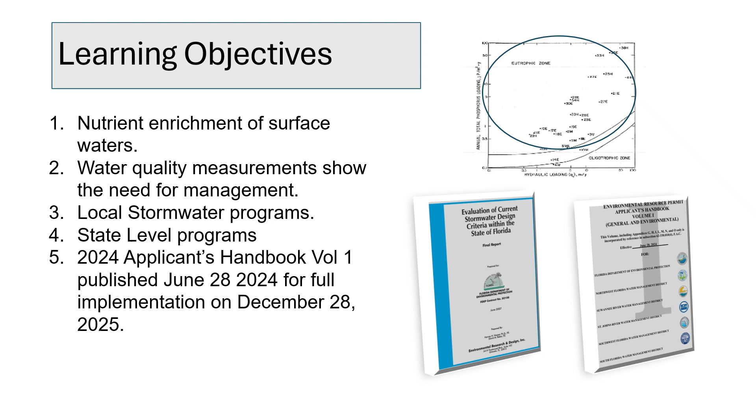Our understanding of nutrient levels in water bodies comes from extensive data collection and evaluation. Historically, back in the 1970s and 80s, significant efforts were made to measure nutrient loadings in surface waters, correlating these levels with surface runoff volumes. What these studies revealed was quite striking. In one particular study area in Florida, over 90% of the surface waters showed a clear enrichment of nutrients. This condition of excessive nutrient enrichment is formally identified as a eutrophic or nutrient excess state.

The scientific findings were further bolstered by a strong social need to address the consequences of this enrichment, such as the frequent algal blooms and the unacceptable odors that often accompanied them. This combination of scientific assessment and public demand provided the necessary support to initiate efforts aimed at improving water quality through nutrient reduction. It's important to note that these nutrient measurements are typically conducted on an annual basis.

This frequency is due to the long holding times of water in many of our lakes and estuaries, meaning that the impact of nutrient inputs plays out over an extended period. Consequently, the performance of stormwater best management practices, or BMPs, is also evaluated based on these annual nutrient loadings.

When assessing the quality of our surface waters, we often use the Trophic State Index, or TSI, which classifies them based on their biological activity. This index is typically calculated using three key indicators: light penetration, measured by a Secchi disk, the concentration of total phosphorus, or TP, and the amount of chlorophyll, often abbreviated as CH. Based on these measurements, waters are categorized into one of three main classifications.

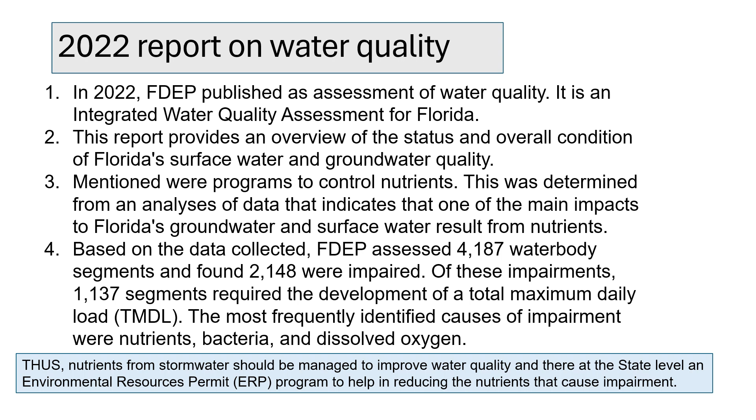To address this, Florida has the Environmental Resources Permit, or ERP program, at the state level. This program is designed to help reduce the nutrients that cause impairment by establishing performance standards, requiring a specified percentage of treatment, and aiming for a net improvement where post-development conditions are equivalent to or better than pre-development conditions.

Building on the understanding of phosphorus water quality data and its relationship to annual runoff, an annual basis was developed for evaluating both runoff volume and nutrient loading. This foundational knowledge then led to the creation of local stormwater programs aimed at reducing nutrients.

For example, Orange County, Florida, was an early adopter, developing a comprehensive code in the early 1970s to manage stormwater. This code was initially based on treating the first inch of runoff water, primarily utilizing infiltration through what later became known as retention basins.

Their specific goal was to achieve an 80% reduction in stormwater volume from new developments. The technical support for these methods was published in 1978 and became a crucial resource for professionals working in stormwater management and water quality improvement.

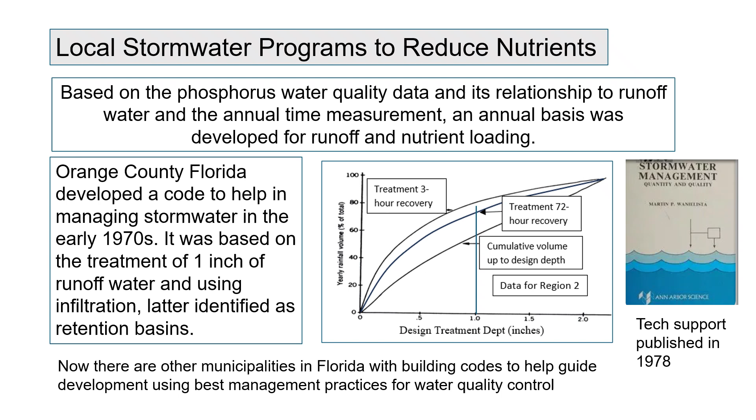Today, many other municipalities across Florida have followed suit, implementing their own building codes and comprehensive plans to guide development using various best management practices for effective water quality control related to stormwater management, all supported by continually evolving technical guidance. Across Florida, there's significant interest at both the local and state levels concerning stormwater management, with many municipalities having established and active stormwater programs.

These local programs typically include detailed building codes, comprehensive plans, and specific regulations designed to protect water quality. Effectively managing nutrients is a key component in meeting these local program requirements and state guidelines.

To support these efforts, numerous organizations specialize in stormwater management throughout the state. These include groups like the Florida Stormwater Association, the Stormwater Academy at UCF, the various water management districts, industry vendors, and many academic programs offered by colleges and universities. These resources provide valuable guidance and expertise.

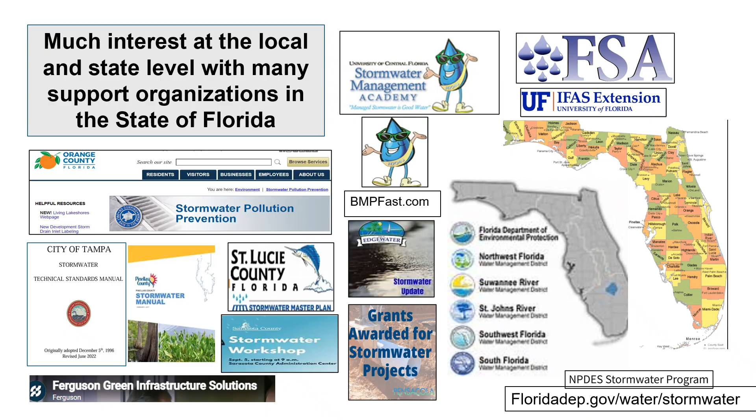Building on the success of local programs and driven by significant social pressure due to frequent algal blooms and unpleasant odors, along with robust research support, Florida adopted statewide stormwater regulations in 1981. This made Chapter 62-25 the first comprehensive stormwater discharge rule in the United States, becoming effective in February of 1982.

This was a technology-based rule that established a performance standard for a minimum level of treatment, specifically aiming to reduce the average annual post-development stormwater pollutant loading of total suspended solids, or TSS. The goal was an 80% reduction for most waters, increasing to a 95% reduction for stormwater discharges directly into what are designated as Outstanding Florida Waters.

These reduction percentages were intentionally set to be similar to those required for solids and biochemical oxygen demand removal in sewage treatment. The rule also included design criteria to achieve these levels of treatment, introduced a rebuttable presumption that discharges from a stormwater system would not cause harm to water resources, and mandated periodic review and updating of best management practices based on ongoing research. This foundational rule, which marked a significant step in stormwater management, was eventually repealed in 2017.

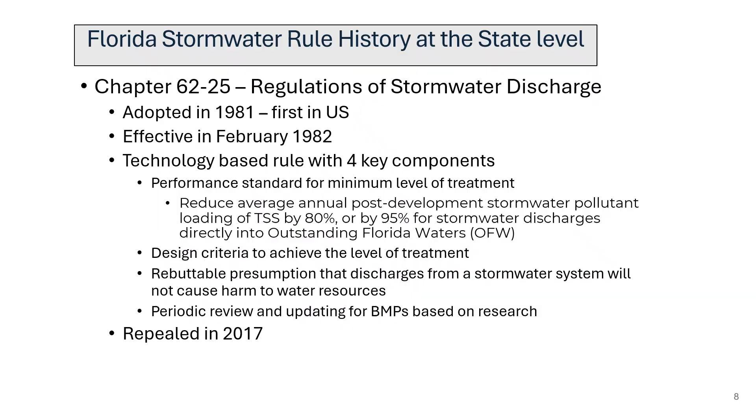Following increased successes in water management and the growing need for stronger direction and enforcement from local governments and conservation groups, the Florida Department of Environmental Protection, or FDEP, and the water management districts were tasked with implementing comprehensive surface water management programs. This led to the development of Chapter 62-40, known as the Florida Water Resource Implementation Rule. Within this rule, Section 62-40.431 specifically outlines the Stormwater Management Program, which became effective on May 7, 2005. Subsection 3A clarifies that FDEP is responsible for coordinating this statewide program.

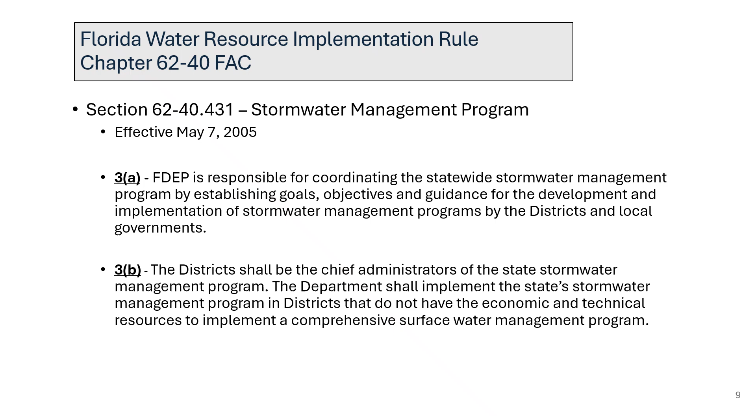This involves establishing the overarching goals, objectives, and guidance that will inform how the water management districts and local governments develop and implement their own stormwater management initiatives. Then, subsection 3B designates the water management districts as the chief administrators of the state's stormwater management program. However, it also includes a provision that if a district lacks the necessary economic and technical resources to implement a comprehensive surface water management program, the department will step in to carry out the state's program in that specific district.

Continuing with Chapter 62-40 of the Florida Administrative Code, we'll now look at Section 62-40.432, which deals with surface water management regulation, a section updated in 2005. This rule outlines specific design and performance criteria that the department and the districts must specify when adopting rules for new stormwater management systems. The core of this section establishes two critical performance standards.

First, new stormwater management systems must achieve at least an 80% reduction of the average annual load of pollutants. This is aimed at preventing pollutants that would cause or contribute to violations of general state water quality standards. Secondly, for areas designated as Outstanding Florida Waters, the requirement is even more stringent. These systems must achieve at least a 95% reduction of the average annual load of pollutants. This higher standard reflects the critical importance of protecting these exceptionally valuable and sensitive water bodies from any degradation. Both of these reduction goals are central to the rule's aim of improving and maintaining Florida's water quality.

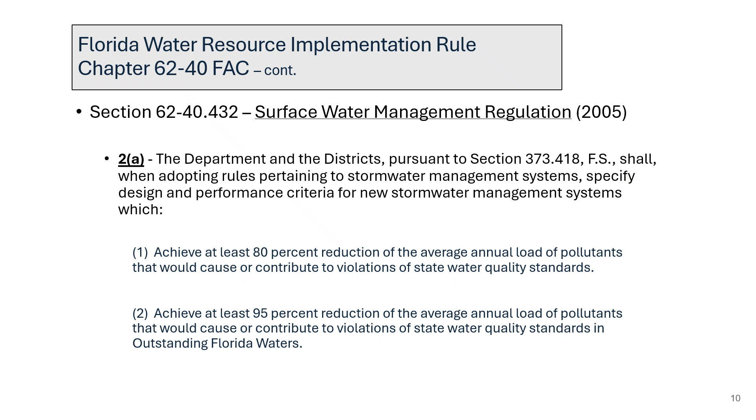While the Florida Department of Environmental Protection, or FDEP, provides overarching guidance for water treatment systems, it's actually the individual water management districts that are tasked with developing the specific design criteria for stormwater best management practices within their regions. This means that design standards and performance efficiencies can vary widely throughout the state, as each district has its own unique set of requirements.

Historically, there was a rebuttable presumption that discharges from these designed systems would inherently comply with state water quality standards. However, extensive research, notably conducted by Environmental Research and Design, or ERD, and various state universities within the Stormwater Management Academy, began to reveal a critical issue. Many of these current designs were in fact not achieving the required reductions to meet those very water quality standards. This research involved significant testing and monitoring to evaluate actual performance.

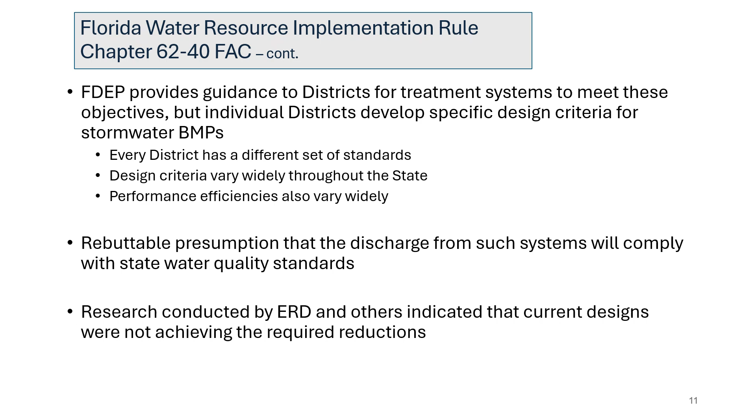In 2006, the Florida Department of Environmental Protection, or FDEP, initiated a contract with ERD to comprehensively evaluate the existing stormwater design criteria throughout Florida. This work was formally performed as part of FDEP Agreement S0108, specifically titled Evaluation of Current Stormwater Design Criteria within the State of Florida. The primary goal of this extensive scope of work was twofold.

First, it sought to determine whether our current stormwater design criteria were effectively meeting the performance standards outlined in Chapter 62-40.432 of the Florida Administrative Code, which deals with surface water management regulation. Secondly, if these design criteria were found to be insufficient or failed to meet Chapter 62-40, the ERD was tasked with recommending specific changes to ensure they would then meet these crucial performance requirements.

Beyond this, the evaluation also assessed whether the design criteria were adequate to achieve the critical objective of no net increase in post-development pollutant loadings. For the purpose of this analysis, the focus was specifically on nitrogen and phosphorus. The reasoning here is that if performance criteria can be effectively met for these two significant nutrients, it's generally understood that they will also be met for other important pollutants, such as biochemical oxygen demand, total suspended solids, and various heavy metals.

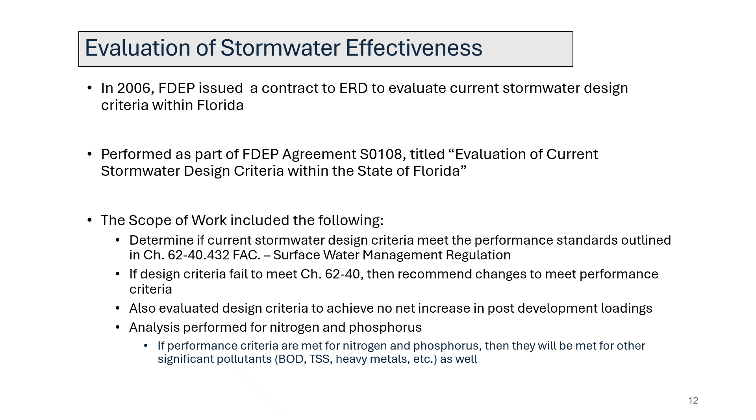Continuing our discussion on the scope of work, a primary goal was to develop design methodologies that are both scientifically defensible and easily reproducible, ensuring they are practical and familiar to design engineers. It's important to note what this particular work did not include. At the time of this research, our focus was specifically on frequently used best management practices, such as retention basins and detention ponds. Therefore, this work did not extend to the evaluation of certain alternative or emerging stormwater management techniques.

These excluded areas encompassed concepts like low-impact design, stormwater reuse, street sweeping programs, pervious pavement installations, and gross pollutant separators. Additionally, the evaluation of wetland loadings was outside the scope of this specific research effort. These omissions highlight the focused nature of the study on established methodologies prevalent at that time.

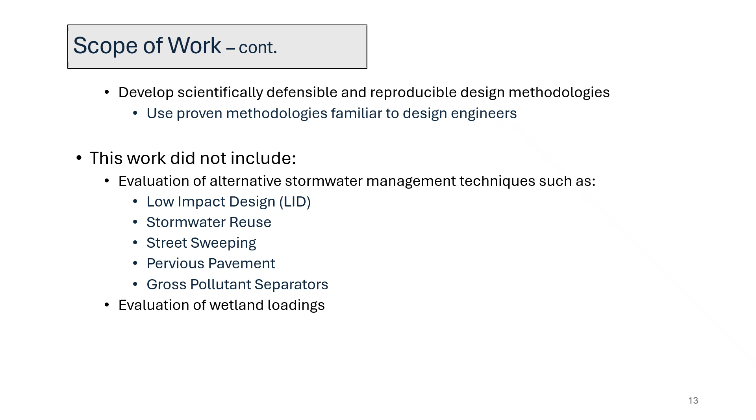Continuing our discussion on published results, a significant report was provided in June 2007, detailing the evaluation of stormwater designs for water quality management from the early 2000s. This comprehensive report included a series of tables, figures, methods of calculation, and design examples. These examples were specifically aimed at achieving both 80% and 95% removal efficiencies, and also analyzed pre- versus post-loadings.

The methodology presented in this report was rigorously vetted by various districts and interested parties through a series of public workshops. Following this thorough review, the districts formally adopted the report as a standard method for calculating load reductions, particularly for use in pre- versus post-analyses. Critically, this foundational work continues to be highly relevant today, forming the basis for the loading calculations and removal efficiencies that are used in the new statewide stormwater rule, and are still widely applied by most regulatory programs at both local and state levels in Florida.

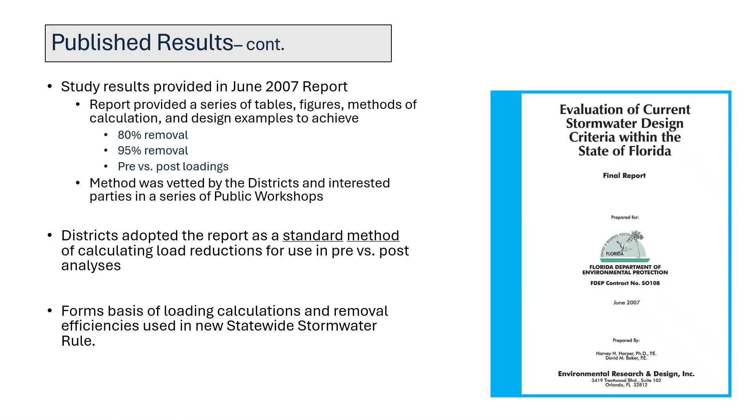Our evaluation of statewide stormwater rule efforts first began in 2010 with the establishment of a Technical Advisory Committee, or TAC. This committee held 8 meetings and ultimately developed a draft applicant's handbook, which was largely based on a 2007 report. To aid in applying the results of this report and other research, Excel-based software was also developed, intended to assist professionals in making timely assessments.

This draft handbook was actually considered by many professionals to be one of the best ways to assess stormwater management programs that use best management practices, or BMPs, to attain the removal of nutrients required by law. However, despite these efforts, both the rule development and the associated state-funded research were unfortunately stopped for about 10 years.

Then, in 2020, a significant development occurred with the approval of the Clean Waterways Act during the legislative session, which was signed by the governor on June 30th of that year. This act was pivotal, as it directly instructed the Florida Department of Environmental Protection, FDEP, to initiate new rulemaking by January 1, 2021. The directives included updating the Environmental Resource Permit Applicant's Handbook to incorporate the most recent scientific information available, considering and addressing low-impact BMPs, and establishing clear measures for the consistent application of the Net Improvement Performance Standard.

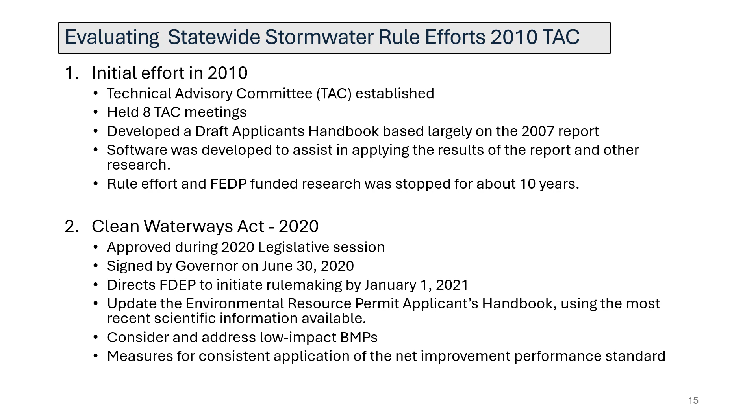Moving on to the 2020 statewide stormwater rule efforts, a significant review of design and professional practice was undertaken between 2020 and 2021. This involved numerous rule development workshops conducted by the Technical Advisory Committee, or TAC. They held 13 meetings from December 2020 through November 2021, where discussions centered on topics like BMP efficiencies, maintenance requirements, and the desired level of treatment for stormwater.

The FDEP subsequently issued a final report in March 2022, which included key recommendations for rule revisions. A major outcome of this effort was the comprehensive revision of the applicant's handbook, updating the version from 2010. Ultimately, on June 28, 2024, the applicant's handbook, Volume 1, was officially published, marking a crucial update to Florida's stormwater rules and design criteria.

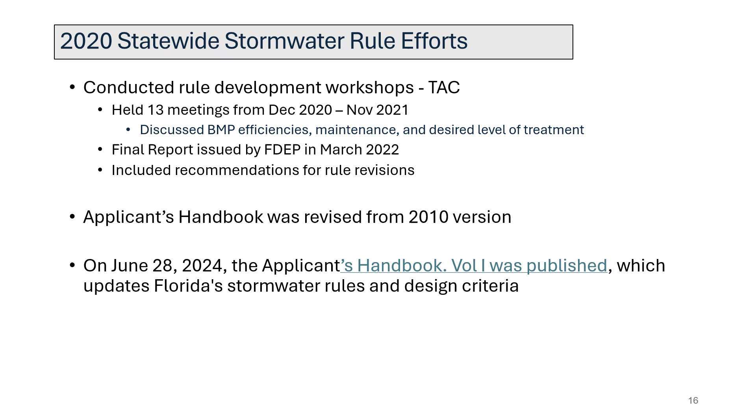Looking at the implementation timeline for these stormwater rule efforts, you'll note that applications for individual and general permits, which are deemed complete after December 28, 2025, will be required to meet the revised stormwater quality nutrient permitting requirements. This date, December 28, 2025, marks the full implementation of all information contained within the applicant's handbook Volume 1.

Beyond implementation, the rule also establishes new maintenance requirements. This includes the need for routine maintenance cost estimates, a certification of financial capability, and the establishment of consistent inspection requirements for the permittee. These inspections will be tailored based on the specific design of the stormwater treatment system itself.

Finally, the rule introduces significant flexibility. Permittees will have the option to use existing or apply for new site or regional specific event mean concentrations, known as EMCs. They can also choose from a range of innovative best management practices and utilize off-site compensation to help meet treatment performance standards. It's important to remember that these criteria will apply specifically at the project outfall.

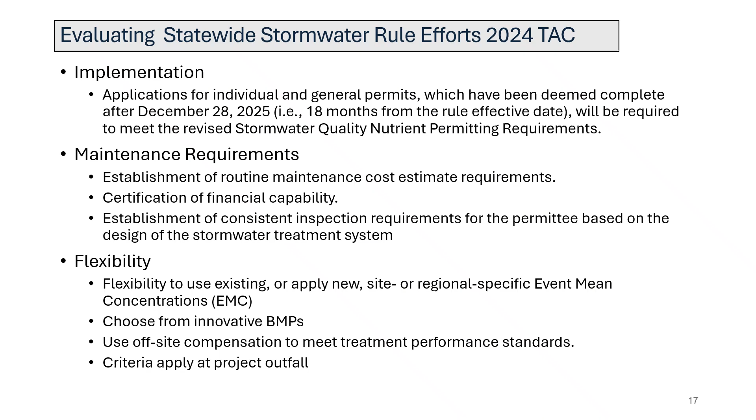Let's now compare the previous stormwater performance standards with the updated 2024 standards. There have been significant changes in the revised criteria, providing much more definition for performance standards and offering a broader range of options for best management practices, or BMPs. Naturally, these updates mean that our calculation methods and the software we use for assessments must also adapt to reflect these new regulations and practices.

A key tool designed to address these changes and to help complete assessments in a timely manner is the BMPFast software. It's developed to not only comply with the current revisions, but also to remain flexible in incorporating future research results as they become available.

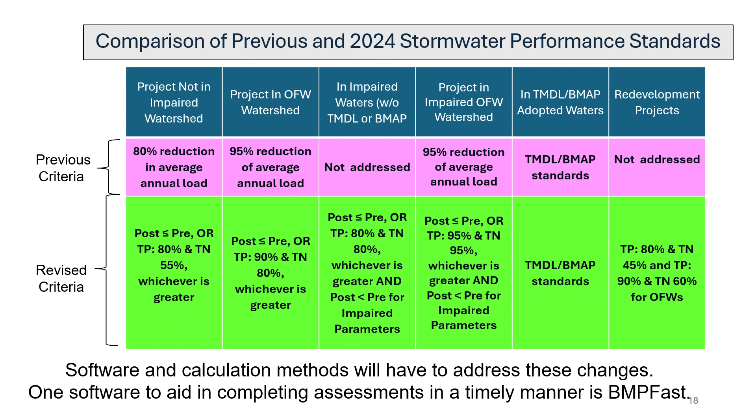Our new performance standards are directly tied to your project's location within a specific hydrologic unit code, or HUC-12 boundary. The HUC-12 is a 12-digit code that helps us designate the conditions of receiving waters. It's crucial for identifying whether the water bodies downstream from your project are classified as impaired waters or designated as outstanding Florida waters, often referred to as OFWs.

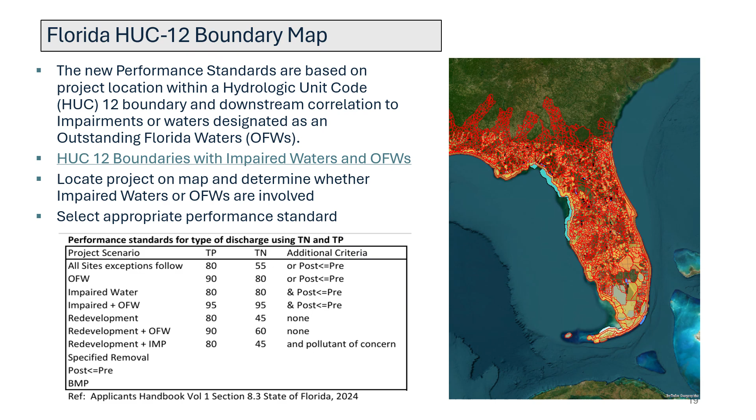Essentially, you would locate your project on a map and determine if it falls within a HUC-12 boundary that includes these impaired waters, or OFWs. This determination is critical because it dictates which performance standard you must select. There are 7 specific performance standards that apply in these situations, along with 3 other options that may be relevant if your project is covered by other permit programs at the local or state level.

The ERP Applicant's Handbook Volume 1, published by the Florida Department of Environmental Protection on June 28, 2024, is a foundational document that sets the standards for stormwater management and water quality control. This Volume 1 was developed by FDEP itself and applies consistently across all 5 of Florida's water management districts. Its content is largely based on a 2007 report and will be referenced many times throughout these learning modules.

Crucially, Part 2 of this handbook, particularly Sections 8 and 9, contains the basic evaluation and design criteria that are essential for assessing plans for water quality improvement. We will frequently refer to these criteria to understand how fundamental science and engineering principles are applied. The handbook also allows for what's known as compensating treatment, which includes strategies like overtreatment or off-site treatment to meet regulatory requirements.

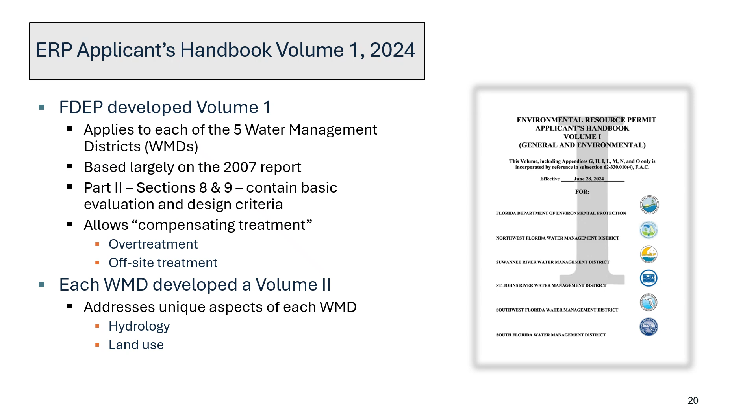In addition to FDEP's Volume 1, each individual water management district has developed its own Volume 2. These district-specific handbooks are designed to address the unique aspects of each WMD, such as their specific hydrology and distinct land use patterns, ensuring that local conditions are appropriately considered.

Throughout this discussion, we've explored the fundamental science and engineering behind managing stormwater runoff, specifically focusing on its impact on water quality. We learned about the critical relationship between stormwater and the nutrient enrichment of surface waters, which has driven the need for effective solutions. This understanding led to the development of local comprehensive plans, codes, and state rules and regulations. We traced how these frameworks evolved over the years, continually adapting to new research findings and advancements in professional practice.

A significant outcome of this evolution is the introduction of the 2024 criteria for performance, which brought about important upgrades to water quality plans. These updated criteria are formally published in the FDEP Applicant's Handbook, Volume 1. We also took time to compare some of the previous criteria with these current 2024 standards, highlighting the key changes and improvements.